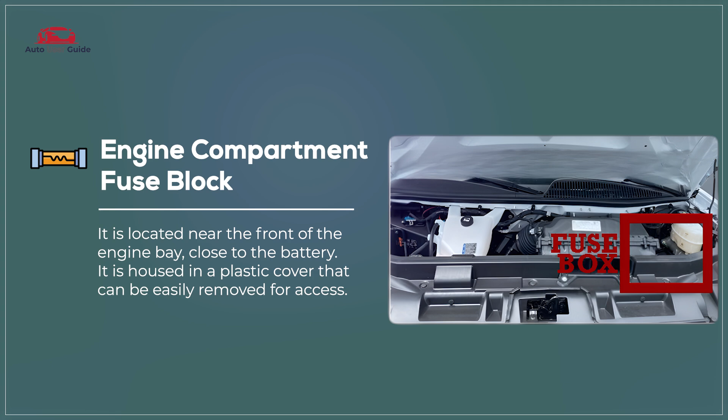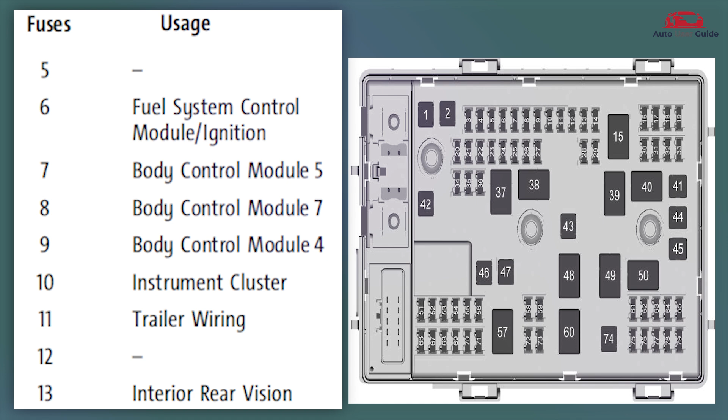Engine compartment fuse block. The engine compartment fuse block contains fuses that protect critical electrical systems such as the engine, fuel pump, and lighting. It features a clear diagram on the cover for easy identification of fuse locations and functions. Additionally, it is designed for quick access, allowing for straightforward fuse replacements and maintenance.

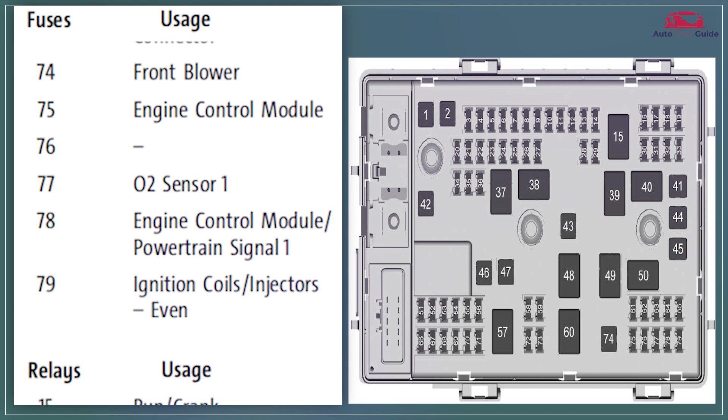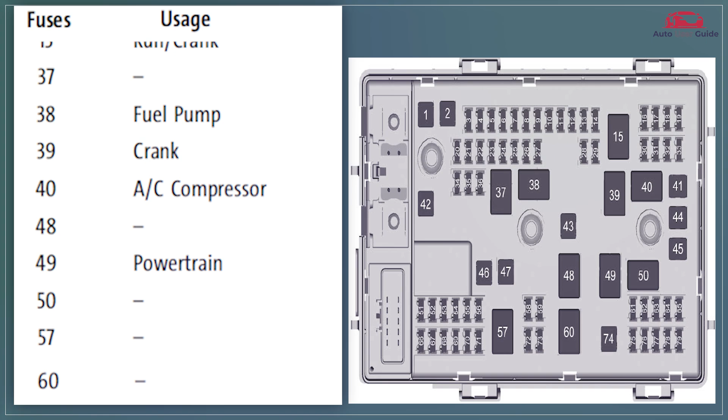Auxiliary fuse block. The auxiliary fuse block contains fuses for additional electrical components and accessories, providing flexibility for custom installations. It often includes circuits for aftermarket equipment, such as auxiliary lights or audio systems. This fuse block is designed for easy access, allowing users to quickly replace fuses as needed.

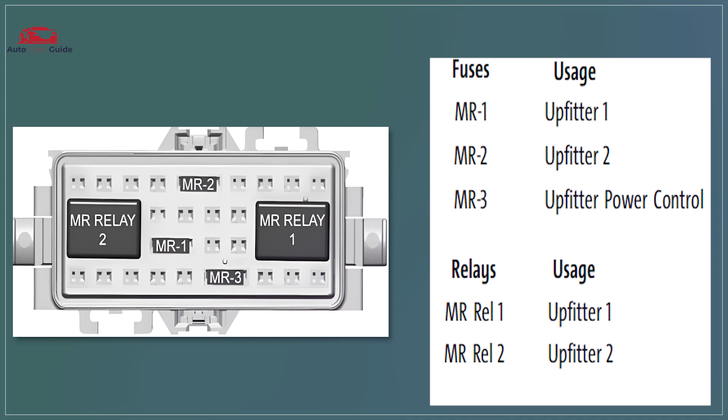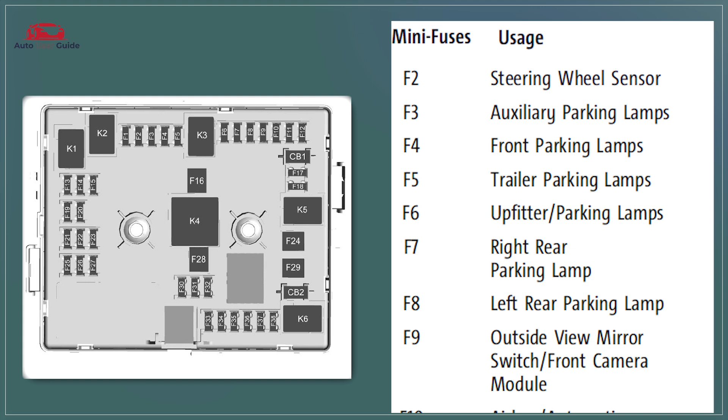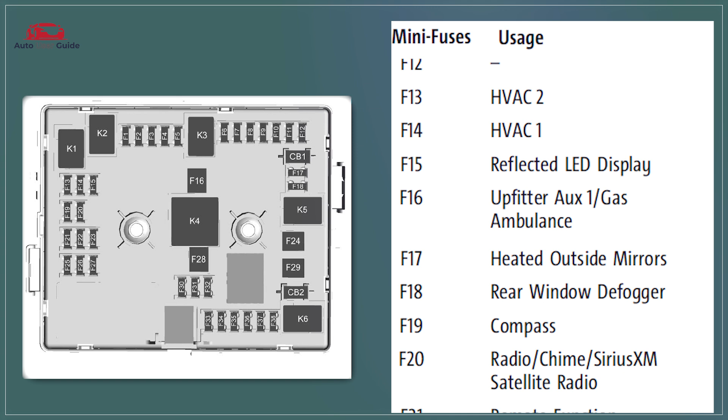Floor console fuse block. The floor console fuse block houses fuses that protect interior electrical components, such as the power windows, radio, and climate control systems. It includes a diagram on the cover to help identify each fuse's function. Designed for easy access, it allows for quick fuse replacements to maintain electrical system functionality.

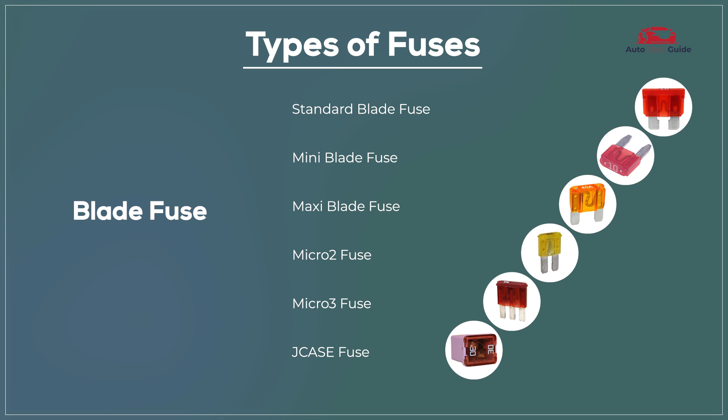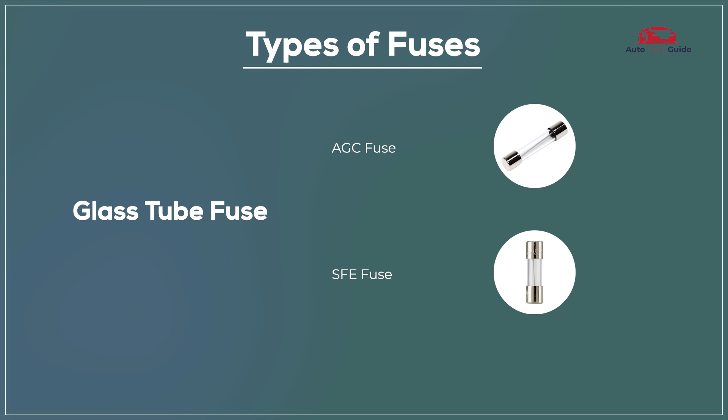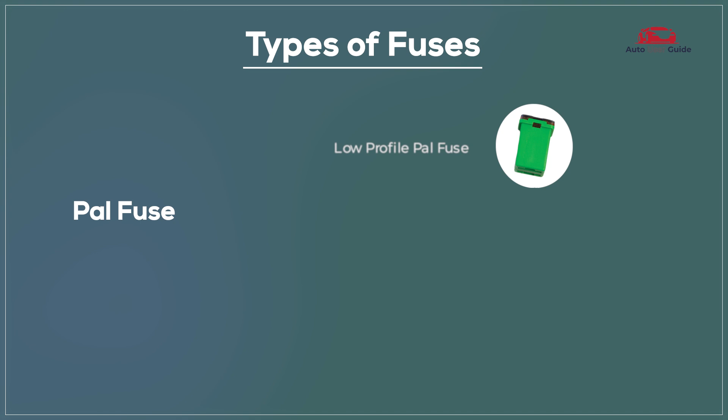Types of fuses: blade fuse, standard blade fuse, mini blade fuse, maxi blade fuse, micro 2 fuse, micro 3 fuse, J-case fuse, glass tube fuse, AGC fuse, SFE fuse, ceramic fuse, Bosch fuse, DIN fuse, PAL fuse, low-profile PAL fuse, standard PAL fuse, link fuse, mega fuse, high amperage link fuse.

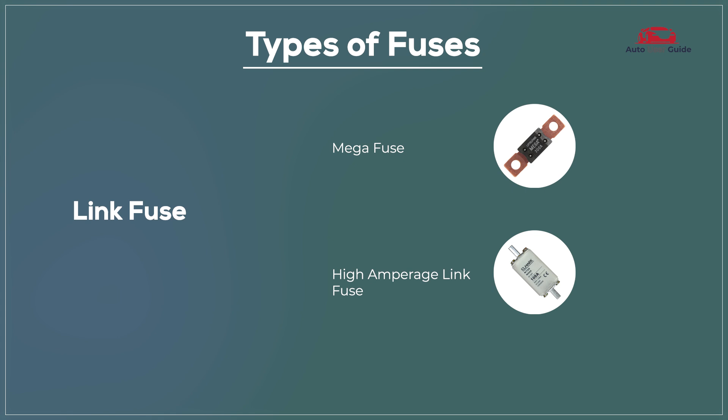Fuse conditions. Blown fuse: a blown fuse means it's no longer functioning and needs replacement, while a perfect fuse is in good working condition and performing as expected.

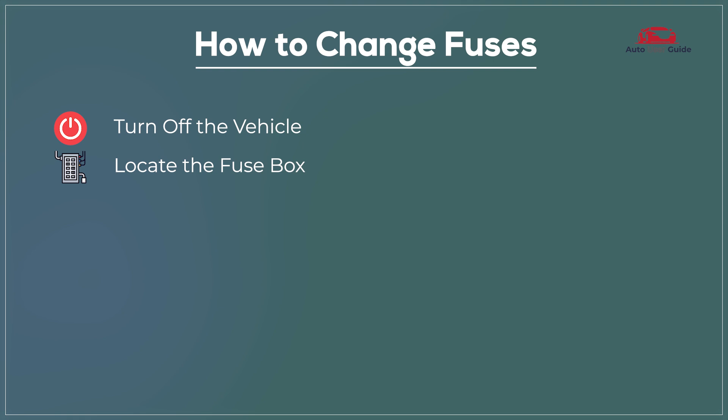How to change fuses: turn off the vehicle, locate the fuse box, identify the faulty fuse, remove the faulty fuse, inspect and obtain a replacement, install the new fuse, and test the replacement.